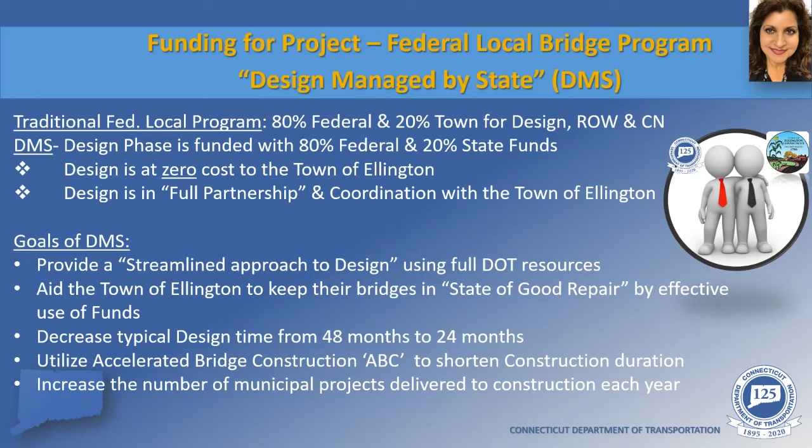Good evening and welcome to the virtual public informational meeting, VPIM, concerning the Strawberry Road Bridge replacement. I am Tim Webb, Director of Public Works, WPCA Administrator for the town of Ellington. This structure has been deemed structurally deficient in need of replacement following biannual inspections by the state. This evening, the State Department of Transportation will outline the proposed bridge replacement project.

Traditionally, the town would have selected and hired a consultant to develop the design, and they would have been responsible for navigating through the design process, with the town covering 20% of the design cost. As Preeti mentioned, when the Department of Transportation offered the design managed by state program to the town, we felt it was a win-win solution for the town, since the state's pre-selected consultants would have better knowledge with the design process, resulting in both an early completion of design and construction.

We started meeting with the state in June of 2019 to obtain an understanding of how the program worked and how it would benefit the town. After several more meetings with the state, the town recognized that this program would be a good joint effort and agreed to go forward with it, signing the contract in September of 2019. While the design efforts have been led by the state, they have kept us in the loop on all aspects of the project, including providing us with various technical alternatives, their pros and cons, and recommendations.

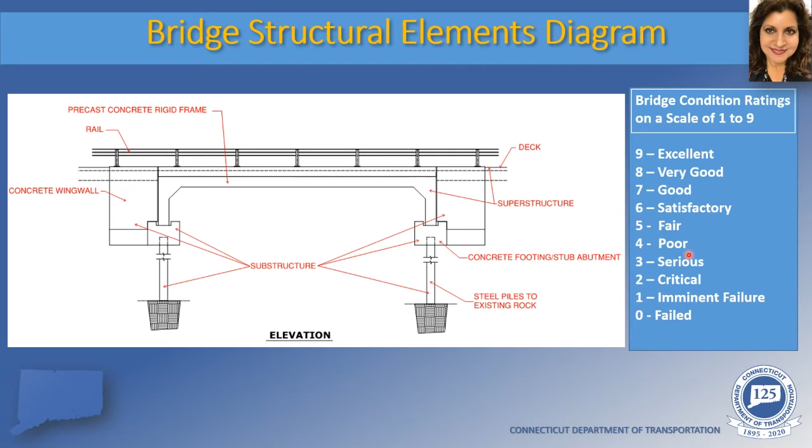Thank you, Preeti. I will now be going over the existing structure and the deterioration occurring, as well as the proposed replacement project. So I'm sure most know the structure is located in a residential neighborhood about 1/3 of a mile west of Route 83 or Somers Road. Here's an aerial view, and again, as most know, the area is totally residential with an apartment complex just to the east of the structure.

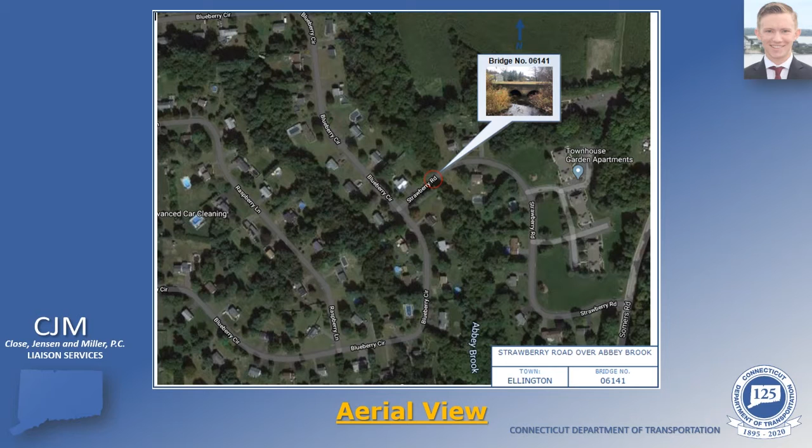The existing structure was built in 1940 and is a triple cell corrugated steel arch culvert with reinforced concrete end walls. The structure is 22 feet long with a 30-foot curb-to-curb width and grass shoulders on either side. The average daily traffic, or the ADT, is about 103 vehicles per day, and that's from the 2019 inspection report.

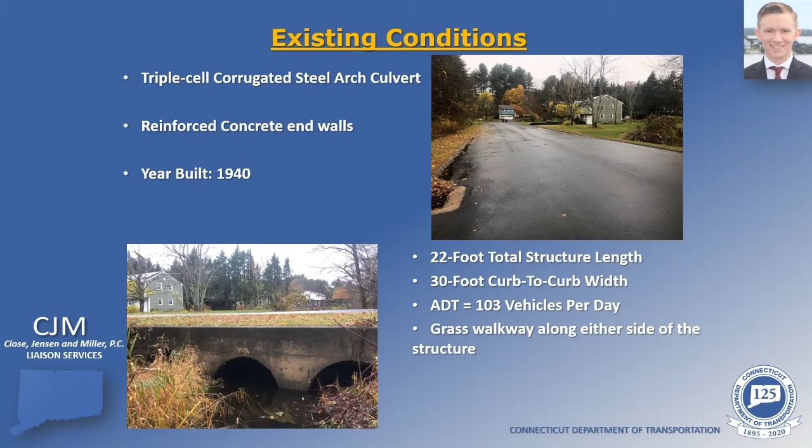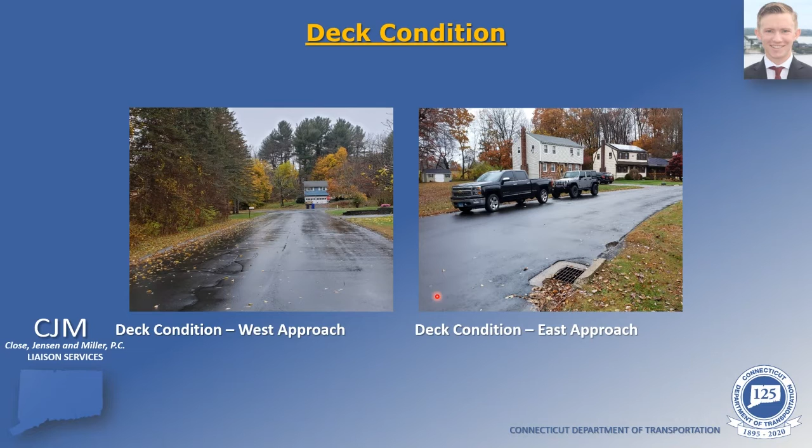Currently, there are isolated random longitudinal and transverse cracks all along the deck surface. The photos here show typical approach deck conditions, which you can see have been repaired, but continue to show signs of cracking.

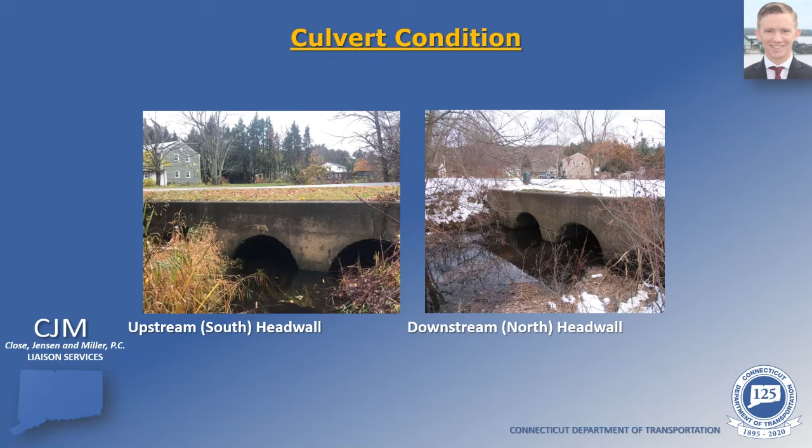The culvert barrels are all experiencing cracking and a loss of the asphalt coating and subsequent corrosion of the exposed steel. There's also a separation of the interior joints of the culvert barrels, as well as a downward deflection. And due to these items, the culvert is given a rating of 4 or poor, which classifies the structure as currently structurally deficient. Here you can better see the headwall conditions and the severity of the cracks and the deflection that is occurring.

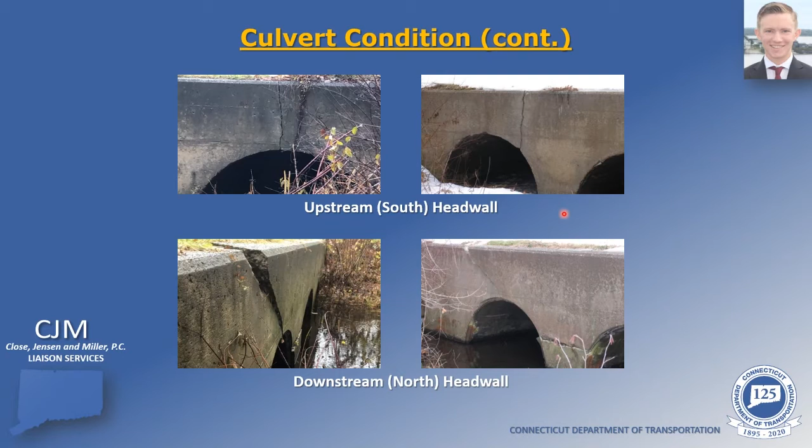Due to the deterioration described, a bridge replacement was considered the most appropriate option. The project consists of replacing the existing culvert with a single-span precast concrete 3-sided rigid frame on a pile-supported foundation. The structure will have a 32-foot clear span and a 30-foot curb-to-curb width consisting of 2 15-foot travel lanes.

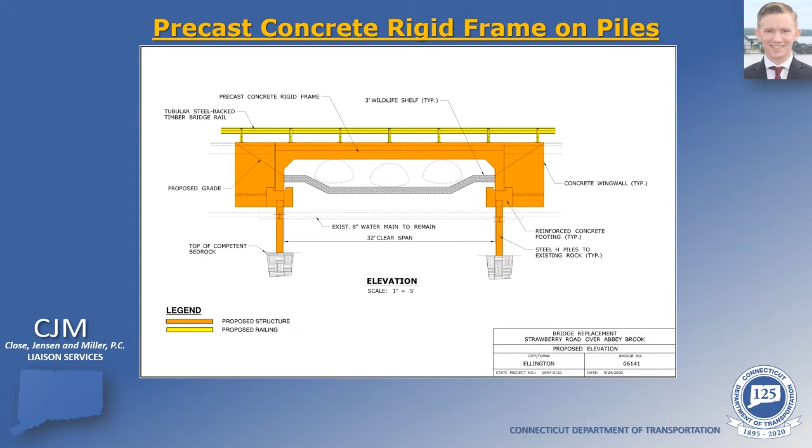This drawing shows the proposed elevation view, and you can see the existing culvert barrels here in gray and the proposed structure with railing in orange and yellow. As I said previously, the proposed bridge will have 2 15-foot travel lanes, as well as the grass walkways or grass shoulders on either side, similar to the existing structure.

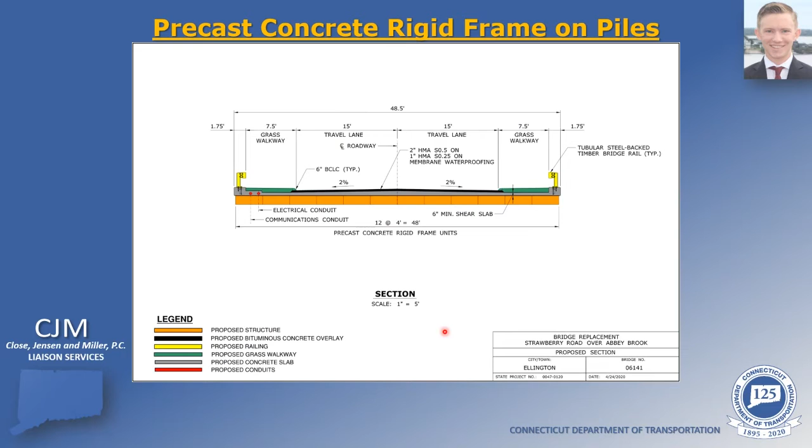The top slab of the culvert will be a 6-inch shear slab with membrane waterproofing and 3 inches of bituminous surface. The section view here just gives you another look at the proposed structure itself. The proposed span length allows for the pile-supported foundation to be constructed behind the existing culvert structure, which aids in construction.

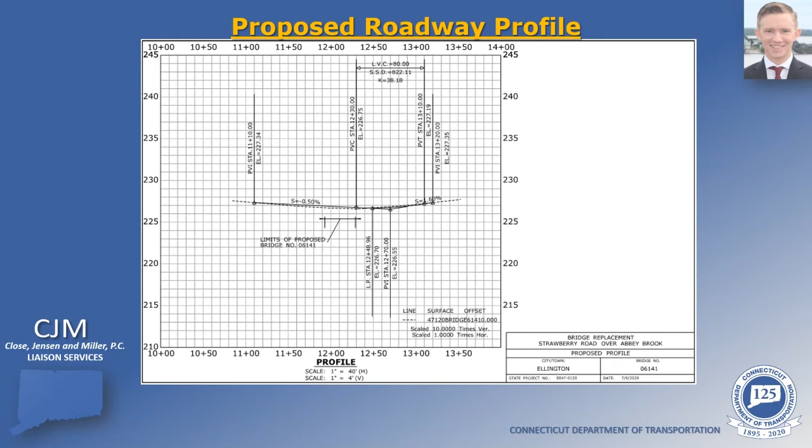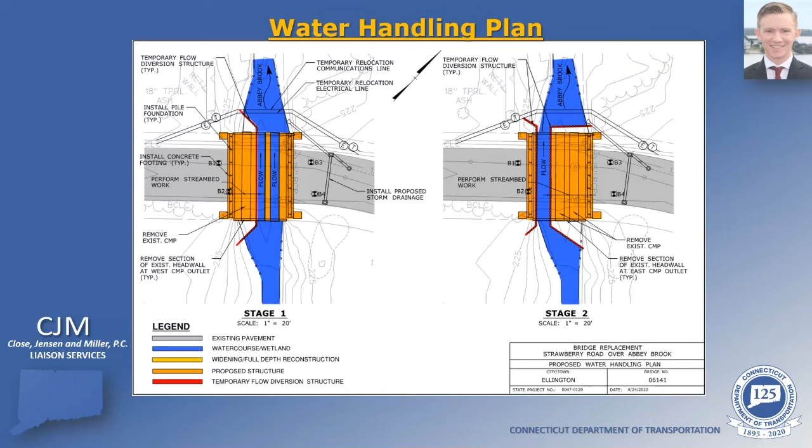To be able to build a structure over water, the water handling scheme is developed. In stage 1 of water handling, flow diversion devices will direct flow to the 2 eastern culvert pipes seen here, while the western pipe is removed and channel work is completed up to the western abutment. In stage 2, the flow will be diverted around the 2 eastern pipes while they're removed and the rest of the channel work is completed. After each stage, the work to shape the actual channel to the face of the frame legs is completed in sequence with the installation of each segment of the rigid frame.

Proposed rights-of-way will consist of temporary and permanent impacts. This consists of minor property acquisitions in the form of a permanent take or permanent easement for the roadway or structural features resulting from the slight widening of the bridge on either side. Temporary construction easements will be required at all 4 corners for construction as well as for the in-water work.

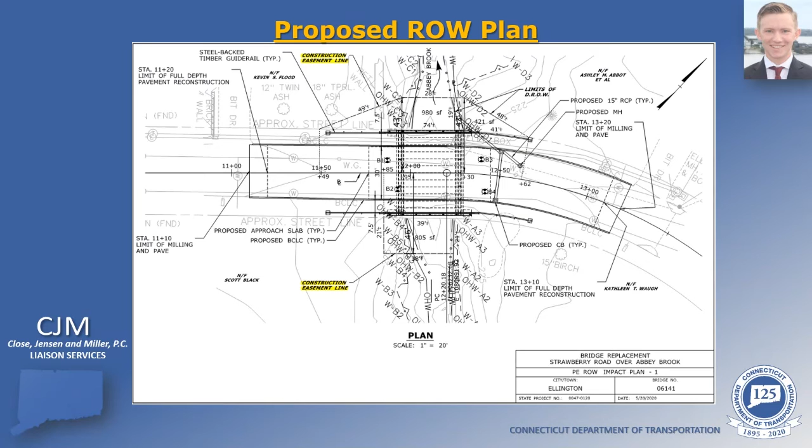Construction is anticipated to begin in the spring of 2022 based on availability of funding, acquisitions of rights-of-way, and the approval of all the permits. An estimated cost for the project is approximately $1,580,000 to be undertaken with 80% federal and 20% municipal funds.

Good evening, everyone. My name is Dennis McDonald, and I'm a representative from the Connecticut Department of Transportation, Division of Rights-of-Way. Tonight, I will be providing a general overview of the right-of-way process. The function of the Division of Rights-of-Way is to acquire all property and property rights necessary for the project. This is done in accordance with Connecticut General Statute Section 13a-73, 13a-98e, as well as the Uniform Relocation Assistance and Real Property Acquisition Policies Act of 1970 as amended. Based on the current design, the proposed property impacts are limited to construction easements. Of course, this is subject to change as the design progresses.

Once property impacts have been established, each impacted property owner will receive a letter of intent to acquire along with a property acquisition map. The letter essentially initiates the right-of-way process, and the map provides a detailed overview of the specific right-of-way impacts. Soon after the letter is received, the valuation process will take place, and once a value has been established, each impacted property owner will receive a written offer of compensation. Property owners will be given time to consider the offer and negotiate should they wish. If an agreement is reached, an acceptance document will be signed, and a closing will take place at a later date.

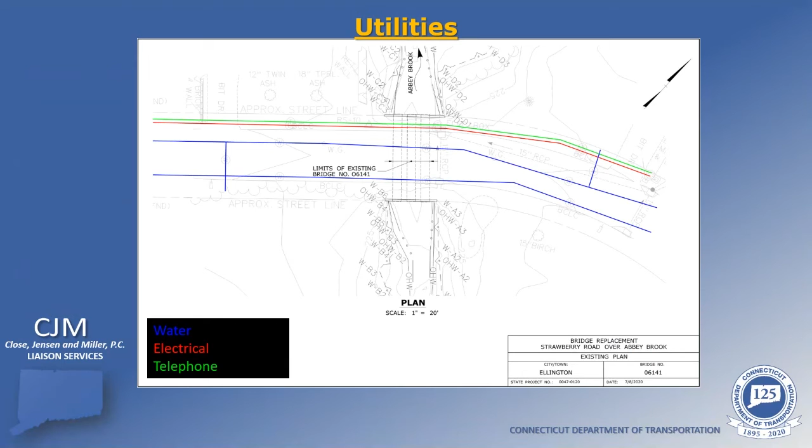We have another question. The underground water main looks like it will be in conflict with the piles that are supporting the bridge foundations. How will this be addressed? CJM, can you please take that question? Yes, so the piles themselves are going to be placed around the water main. So essentially they'll be sort of framing the water main. And obviously during construction, we will double check where everything is and make sure that nothing is going to be affected. Thank you, Andy.

Okay, the following email question was received. Is the detour going to take place during the school season? And if so, how will school buses be affected? CJM, would you like to start off on that question? And Tim Webb from the town of Ellington, would you like to also add to that question if you want to? But we'll start with CJM.

All right. Yeah, construction is anticipated to start in the spring of 2022. So it's more than likely that the detour will occur for a portion of the school season, but that'll be coordinated with the town, obviously, to ensure the least amount of impact to anybody. Yes, this is Tim Webb, Director of Public Works, Town of Ellington. We've worked closely with the Board of Ed and the school bus company to ensure that whatever needed to be done, and advise the community residents that need bus transportation that if there are any delays, we'll work around it.

Okay, thank you very much. We have another question. Is pedestrian access going to be allowed for crossing the bridge during the detour? CJM, will you please take that question? Yep. So pedestrians will be able to cross up until the existing structure is removed, obviously, and construction starts. Unfortunately, the cost of installing a temporary pedestrian bridge or to add access is extremely high and doesn't really appear warranted here.

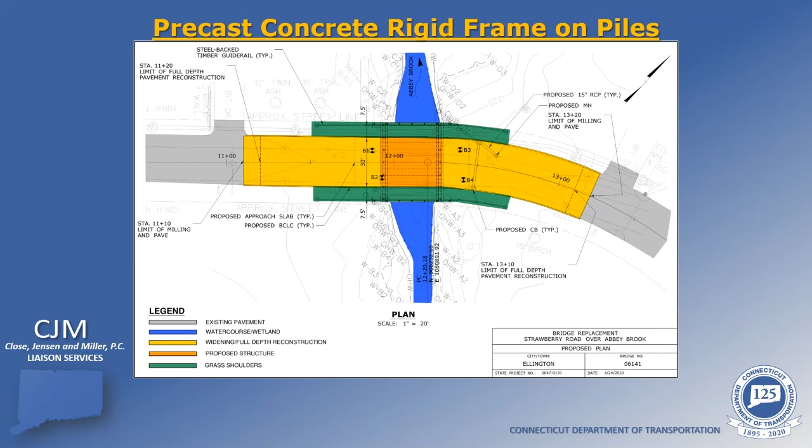We have another question. Will the new bridge receive aesthetic treatments to make it fit in with the surrounding environment? CJM, will you please take that question? So again, we're working with the town to make sure that the proposed structure fits in similar to what the existing one looks like, but because the existing structure is fairly simple aesthetically, we're pretty much just keeping that appearance while still trying to maintain and meet the various design standards, like the bridge rail that needs to be added. Okay. Thank you, Andy.

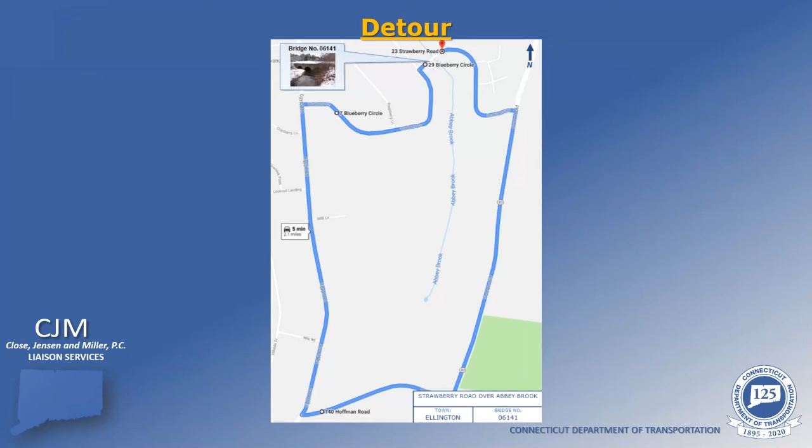We have another question. The following phone question was received. How long is the detour route, and can you please show it again? CJM, can you please pull that up and answer that question? There we go. Yes, so the detour is about 2.1 miles or about 5 minutes all around, and it includes Blueberry Circle, Egypt Road, Hoffman Road, Somers Road or Route 83, and obviously Strawberry Road itself. Okay. Thank you, Andy.